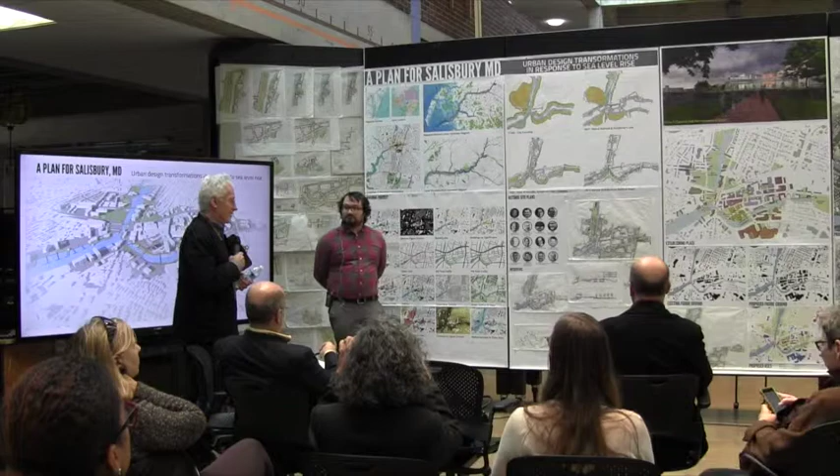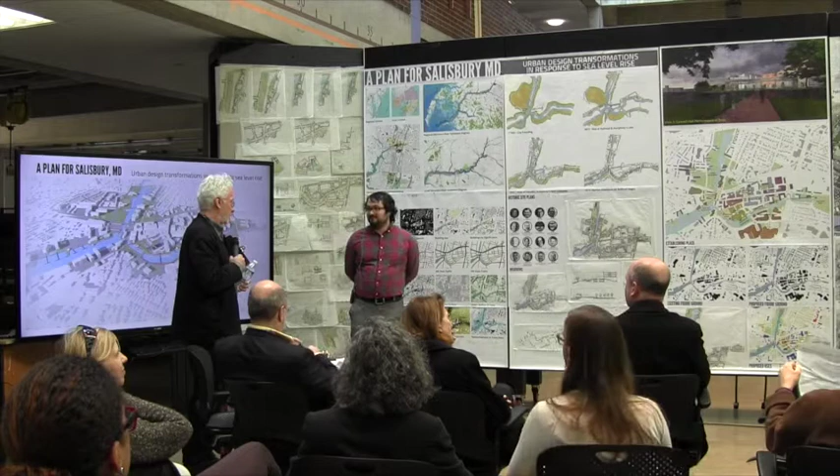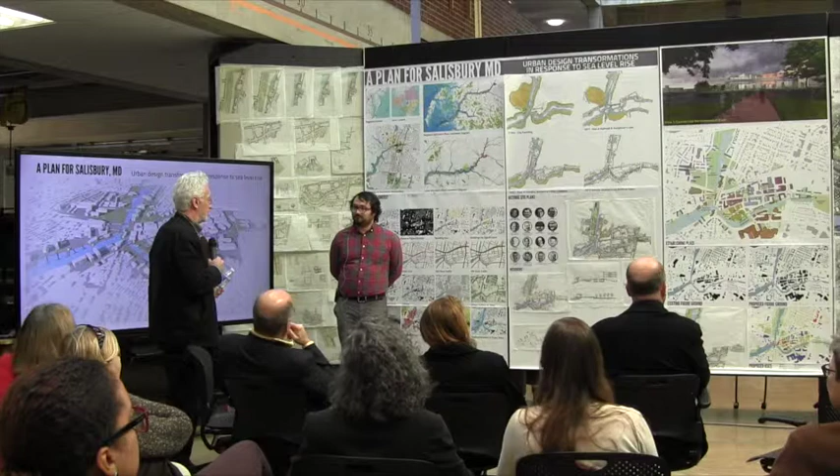And Dan has really—if you thought some of these thesis projects have covered a lot of terrain, you ain't seen nothing yet. Dan has, I think, alongside maybe one other student, been a relentless agent of stewardship, work, and energy in this thesis studio. We don't in these gatherings get a chance to see the background work that you've done to research this project, and that too stands out strong and tall among all the thesis students. But I look forward to hearing responses and reactions to your hypothesis about how to help this community understand its opportunities, to translate its threats into opportunities that operate on a variety of different scales. And I look forward to having you unpack this for us. Thank you.

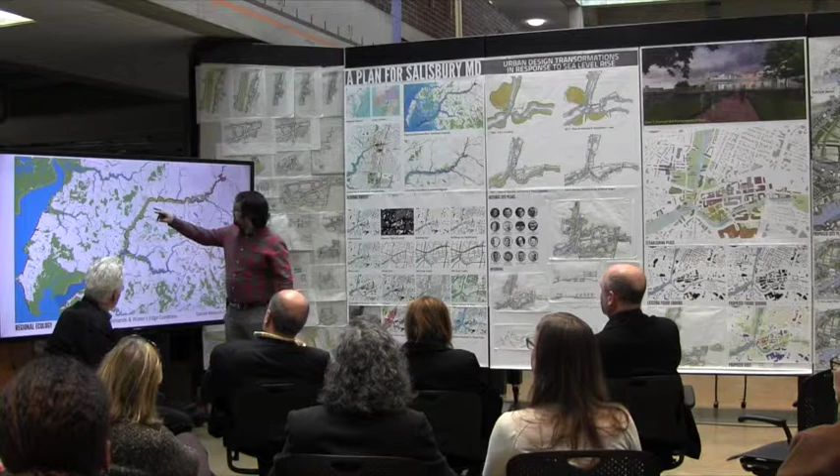This shows the Wicomico River itself and its connection to the Chesapeake Bay. The yellow is riparian condition, red is seawater access structures, and black is a hard edge. What's happened is the Wicomico River has been dredged—it wants to take this meandering path, but it's got a hard edge, and development has formed along its sides. Salisbury is up here.

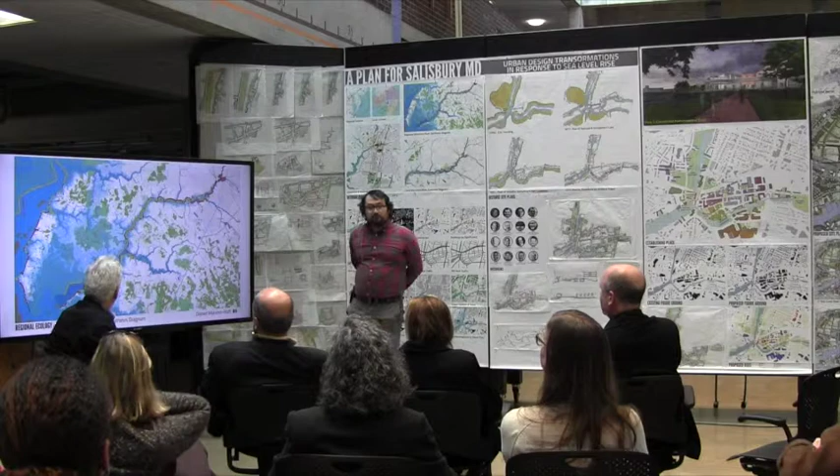This shows what sea level rise would do to the region. Really what this shows is that there will be whole areas that will be completely demolished and will no longer be viable as communities. Zooming in, we see some of the trend. We also see that there's opportunities to capture some of the storm surge downstream.

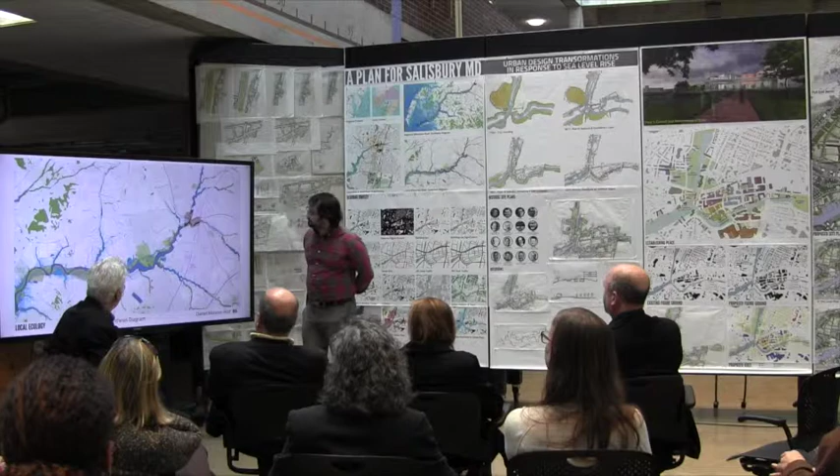This is my project site, and these are the connections to other major hubs in Salisbury—Salisbury University down here, this is the hospital, and the Perdue chicken plant. This is my site area. I'm trying to reach into the extensive healthy fabric and transform the relationship to the riverfront.

This figure ground—you can really see that downtown is in an island condition, created by two major highways and two prongs of the Wicomico River. The river's figure ground really shows this.

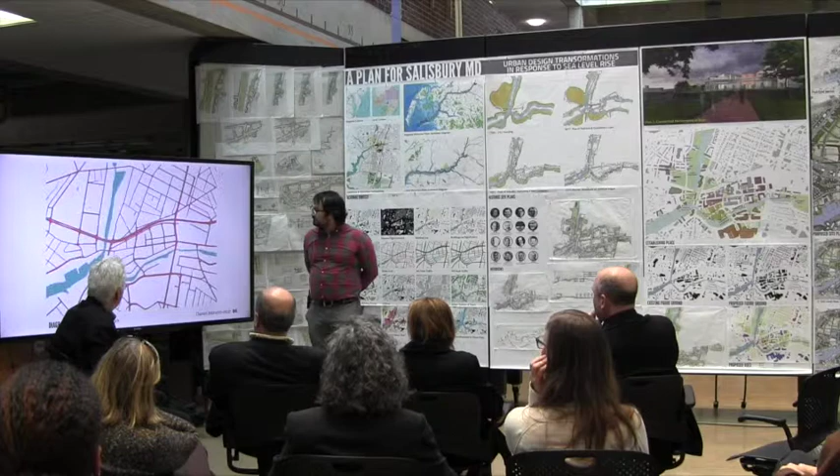Salisbury's street network has several problems: poor block dimensions, streets that start off as major ways to get into downtown and sort of peter off and become anything, and Route 50, which was inserted between two blocks and now creates a sort of mega street with building faces in excess of 250 feet.

With the help of my parents, I did a traffic study. Thanks so much. Yeah, my brother.

What you see is really that there's very little traffic through downtown, and this is one of the problems with downtown. Furthermore, working with the traffic expert, we also found that many of these corridors are actually over-engineered and can be reduced to fewer lanes.

So one of the challenges getting into Salisbury is that all of these streets are very difficult to traverse and the pedestrian connections are very poor. Looking at sidewalks and building frontages, you can see the manifestation of some of these poor block dimensions—an inability to engage with the waterfront. And bike lanes show poor connections into downtown for all modes of infrastructure.

Looking at uses, we find that there's a lot of office space downtown, very few people living downtown. Furthermore, there's a sort of haphazard mix of uses, creating a sort of placelessness, a lack of distinct neighborhoods.

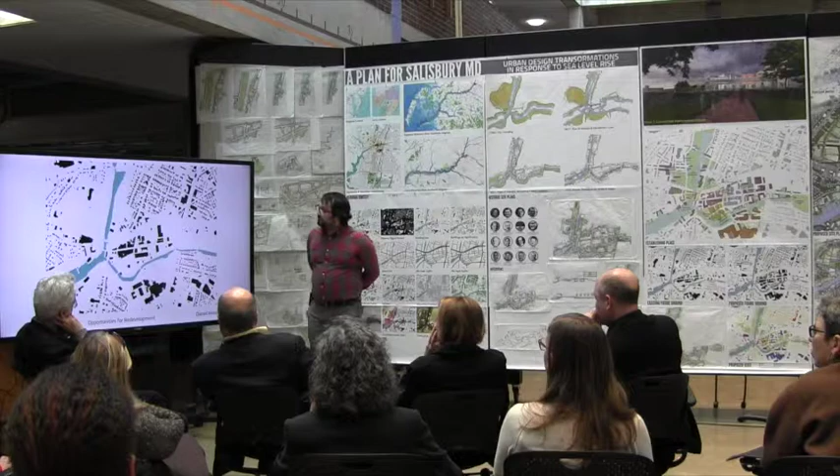Then I categorized buildings by their opportunity for redevelopment. Are they the highest and best use? Are they compatible with what's being used in the area? And what I found is that there's an opportunity to transform the relationship to the waterfront and transform the relationship to this threat of sea level rise.

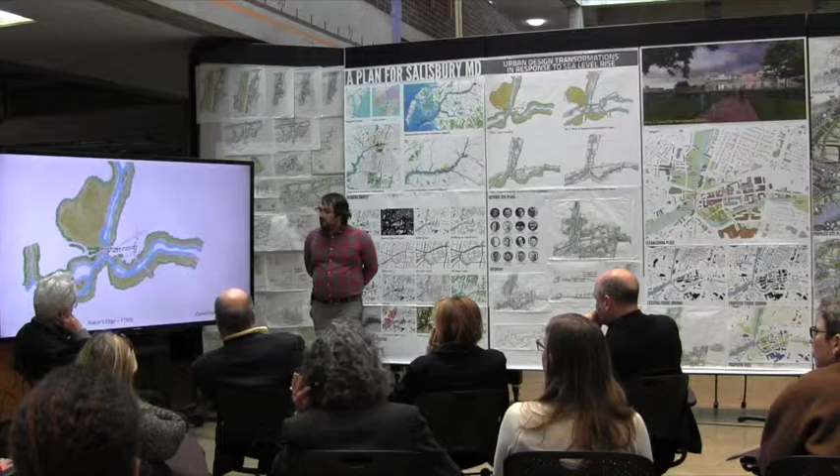I looked at the history of the waterfront condition. When Salisbury started out, it was built along the high ground on Main Street and Division Street. This is that low-lying area that I showed you previously, and many of the areas around it were very sort of soft riparian edges, wetlands.

This is about 1877. They took the major north-south street, Division Street, and created a dam for logging, and a big lake filled up the area. These were cranberry bogs up here on the north side of town. And this actually proved very useful because it helped me understand what the natural condition wants to be in some of these areas, and influenced where I thought about including a more riparian natural landscape.

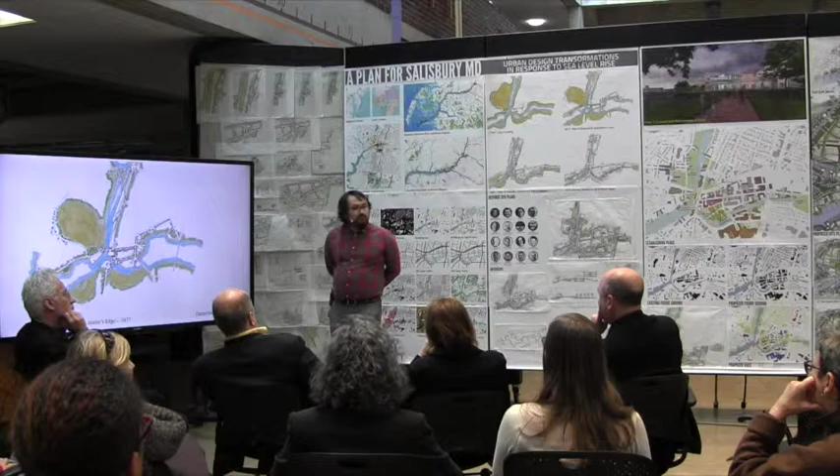We're seeing a railroad? Yes. Salisbury was a major trade hub for the eastern shore. A lot of goods would come up the river, because the Wicomico River was dredged, and come down the rail—this was their moment of interface. And as you can see over time, they really developed density along that area, and you have a lot of dense development along the waterfront, taking what was formerly a riparian condition and developing along it because of the industrial use.

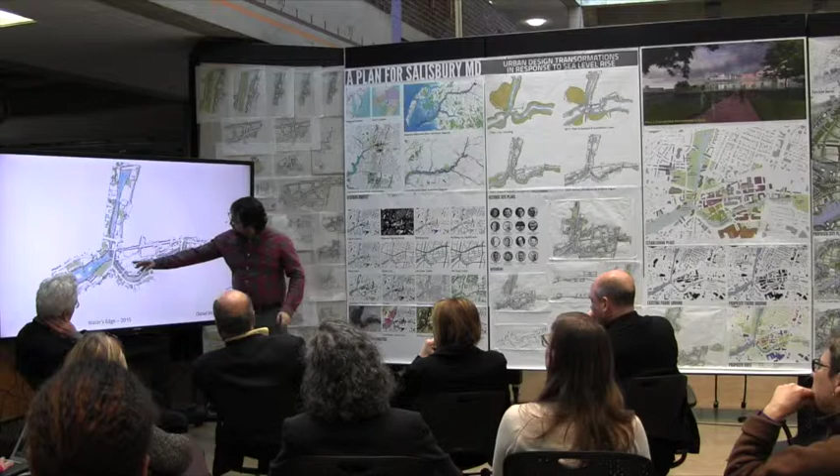This shows the condition today. Still a lot of hard edge, but not much reason for it to be hard edge anymore. And this former density that you saw is now given way to a lot of parking lots, empty spaces. There's been little redevelopment in downtown in the last 50 years.

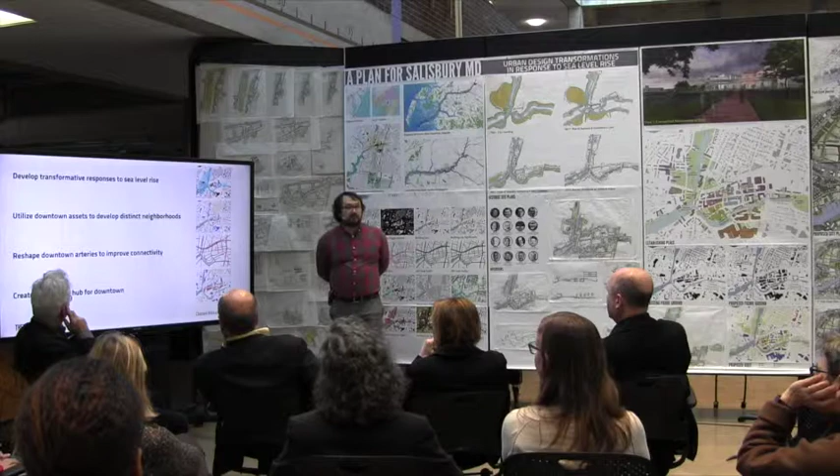Out of this process, I developed 4 principles that drove the thesis: first, to develop transformative responses to sea level rise; to utilize the existing assets downtown to develop distinct neighborhoods; to reshape downtown arteries to improve urban connectivity—correct the blocks, correct the street problems—and create a 24/7 civic hub for downtown. This was about investigating what the first phase in development should be and how it can be catalytic, which was the real estate portion of my thesis.

What did I do? Hold on a second.

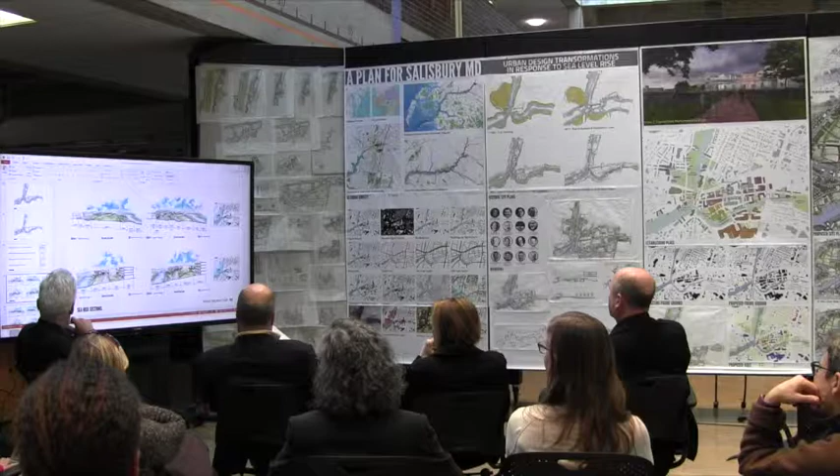So then I looked at, started drawing a lot of sections, thinking about what this riparian condition could look like. These are sort of diagrams, but I also actually took them in real places downtown, and thought about how that condition might look today and how it might transform over time as sea level rise comes in, and how we can embrace that transformation.

Maybe have a little fun with it too. Perhaps there's outdoor stages that turn into floating stages. And then I looked at different areas. This is looking at that area that's facing some significant inundation. We'll probably have to put a levee in there, but that doesn't mean you can't engage the waterfront. You can build it into buildings, build it into pedestrian paths.

And then I started looking at block typologies. How can we rethink building typologies and block typologies in order to respond to these needs? Open up to the water, pull up for protection, let the ground plane do what it needs to do, in order to bring in the water.

This led me to a couple specific strategies. This is a typical block type of multifamily typologies. Open up to the waterfront, switch to single loaded corridors in order to capture the economic value of the waterfront. Raise it up. And as you see, sea rise can do what it needs to do. Probably want to make these buildings a little longer for core efficiency.

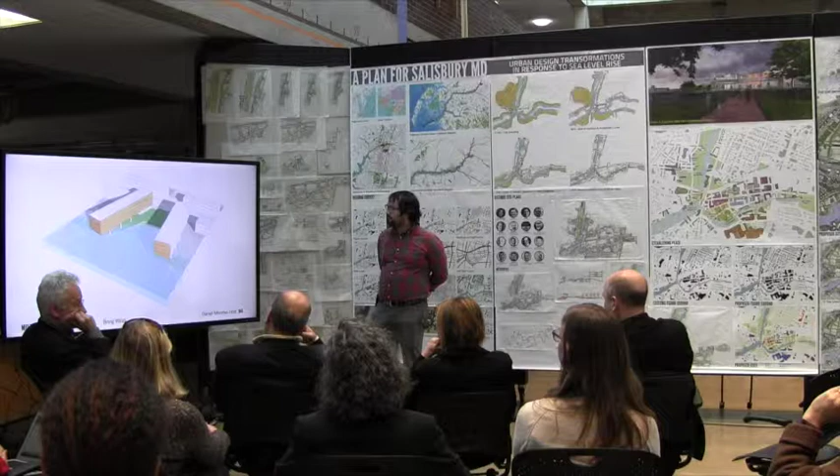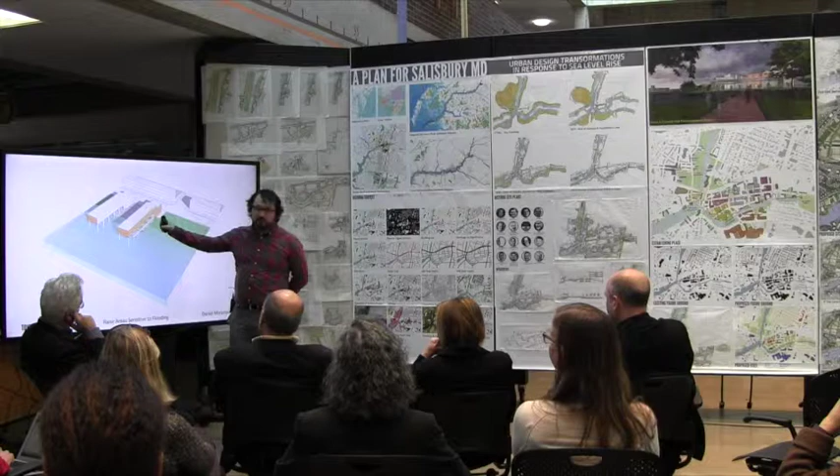Looking at a townhouse type. Pull back to create more green space. Pull it up. We retain our defensible space in here, and we can use that elevation change. We can create a clearly defensible corridor, or zone rather.

And then cant it and open it up. These reach down and come down to the ground, so the street's reaching up, the building's reaching down. But then when that's no longer possible, when the landscape goes away, the building takes a much more dramatic relationship to the landscape.

So, first phase of development. I thought this was really the place to start with developing downtown. This is the heart of Main Street right here. And this site, this existing parking lot, is a great place to start. The two streets that bookend it also bookend historic Main Street, and it has great views to the waterfront. And it's all owned by the city, so acquisition is easy.

So let me take a step back too. I really looked at a lot of different uses. I ended up proposing a civic hub for downtown. I believe that this is something that can invigorate downtown without it competing with existing retail businesses, and it capitalizes on the existing assets of the place.

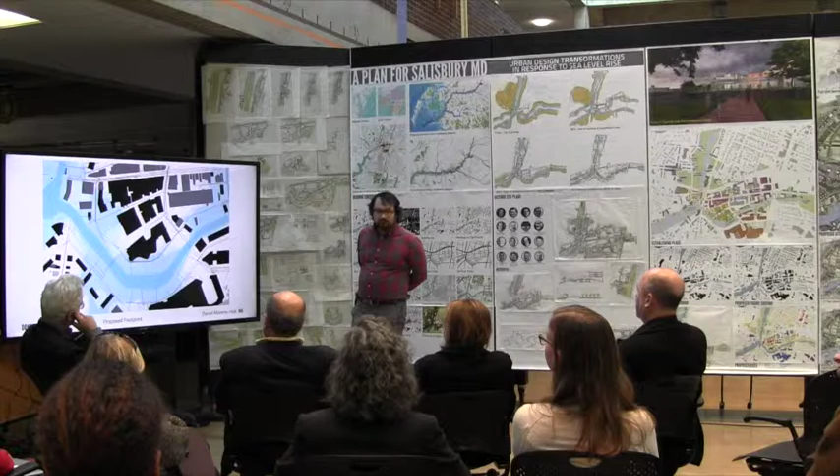So the existing condition, opportunities for redevelopment, and correcting some of the block conditions. Looking at the water and looking at underground utilities, you start to influence a possible footprint. This is how we think about protecting against sea level rise. Some of the west end of downtown is sensitive to it, so putting up a dam. Some roads will have to have temporary structures put on them. And then over here, I'm proposing a sort of elevated deck that can also act as a levee, finding ways to transform this infrastructure into an asset.

And then this is the proposed future sea level rise sensitivity, and improving the watershed condition.

And then this is the proposed uses for this place. They proposed a civic hub for downtown. Downtown is lacking many civic amenities, anchored by a civic plaza. This will include a new library in addition to Salisbury University's Adult Learning Center, which is located here. The concert hall, a hotel.

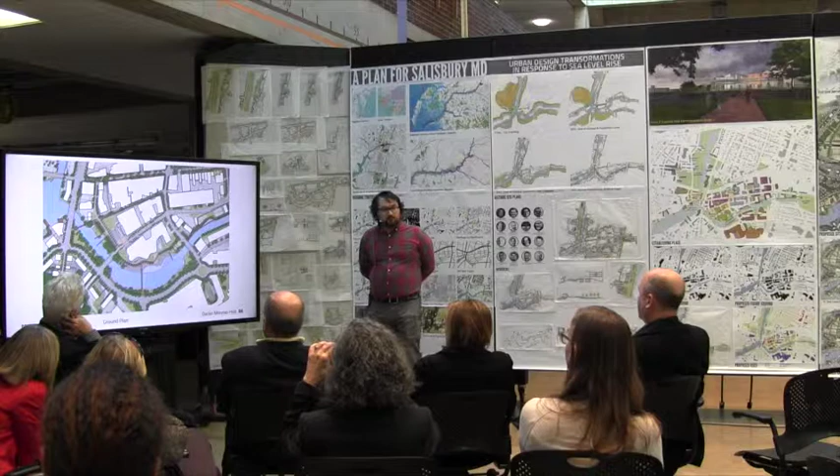Proposed uses. Here's a site plan, and here's a sort of Nolli plan showing the ground condition and showing how it transforms as sea level rise occurs.

This is a Nolli plan of the whole neighborhood, showing the parking garage and how it makes connections to other buildings, a hotel with a restaurant, the Black Box Theater, a concert hall. The library will include a ground floor living room, a double height space, and you go up to the main level, a 21st century library. And then Salisbury University's Adult Learning Center makes a connection to a pass-through that goes directly to Main Street.

This is what the plaza will look like, and here it is transforming over time. It's important to recognize that these changes happen in different temporal scales. It can be immediate storm surge, but it's also long-term. So 3 feet represents a significant storm event today, and it can also represent 50 years from now. But 8 feet at all times represents some sort of significant storm event.

Here's a view of the plaza and how it transforms. You can see that in the future, our relationship with the water will be much more tenuous. We'll have to live in zones of ambiguity.

Here's a section, and here it is all working together. Here's a view of that concert hall from the south.

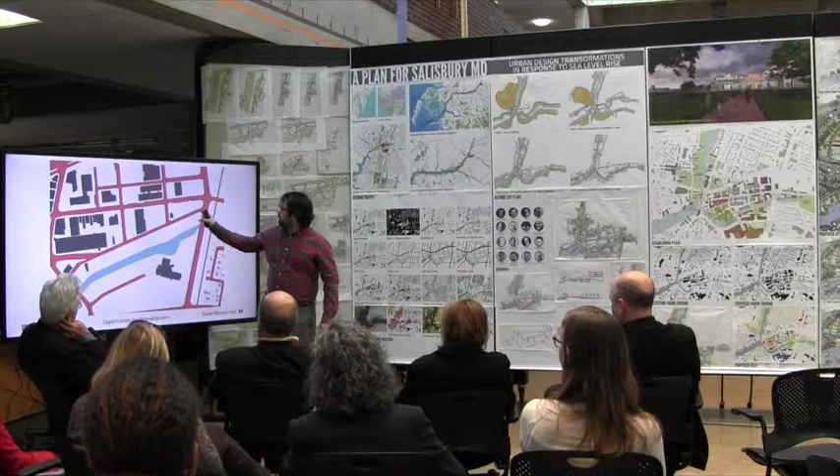Next we jump to the south prong over here. This is the area that needs some sort of significant protection - this whole area is underwater. So looking at the existing condition, we remove opportunities for redevelopment and correct the block structure by removing the street. We remove this poor connection with the neighborhood and allow these blocks to make a more dynamic relationship with the waterfront and capitalize on that space.

Here's what sea level rise will do, and here's how we're going to protect against it. We propose putting up a levee. You might have to raise this road slightly and then put some sort of temporary blockade up here so the water doesn't pour back in after you do all this.

Proposed contours - so we're not elevating that whole part back there, but we are protecting it from sea level rise through that levee. Then looking at underground utilities and using that elevated building to avoid hitting major utilities. The stormwater runoff is coming in from both sides, so we take these two streets and pedestrian corridors that connect to the waterfront and really green them, transforming them into areas that can absorb the water as it comes down here, so you have to pump less water back up.

This is the figure ground, and these are the proposed uses. I proposed on the south side here putting in a health and wellness district. This capitalizes on the existing hospital just south of here, and has a health services school that's actually been proposed by Salisbury University, in addition to senior housing, events that might take place along the waterfront, dog parks, exercise areas, and growing gardens.

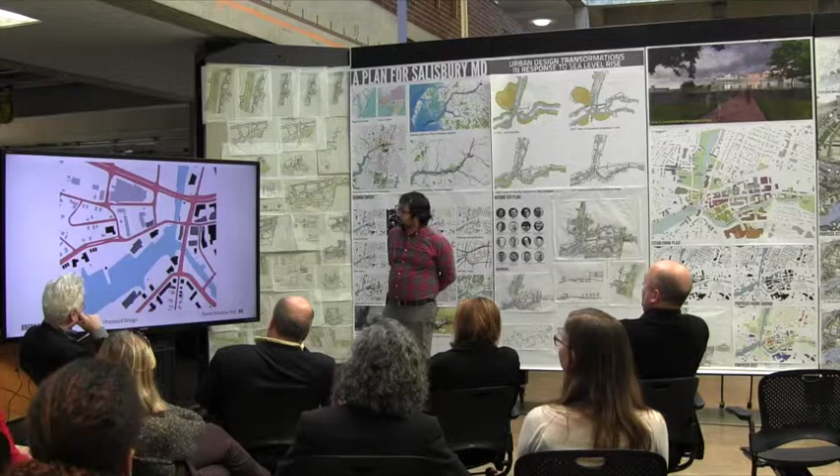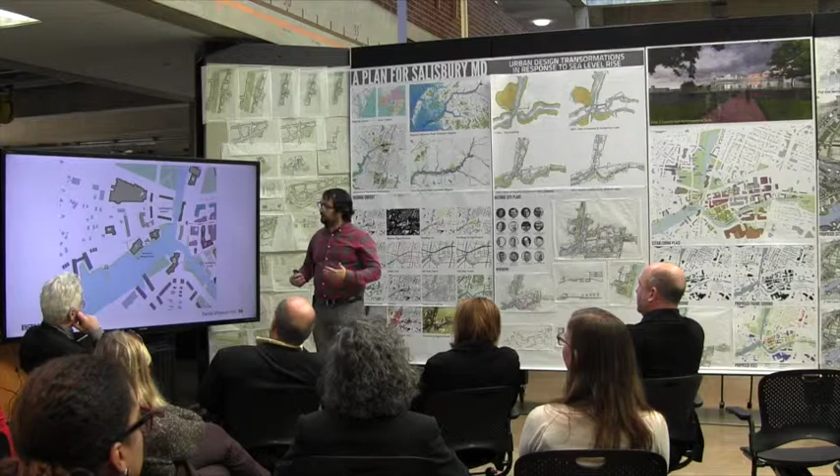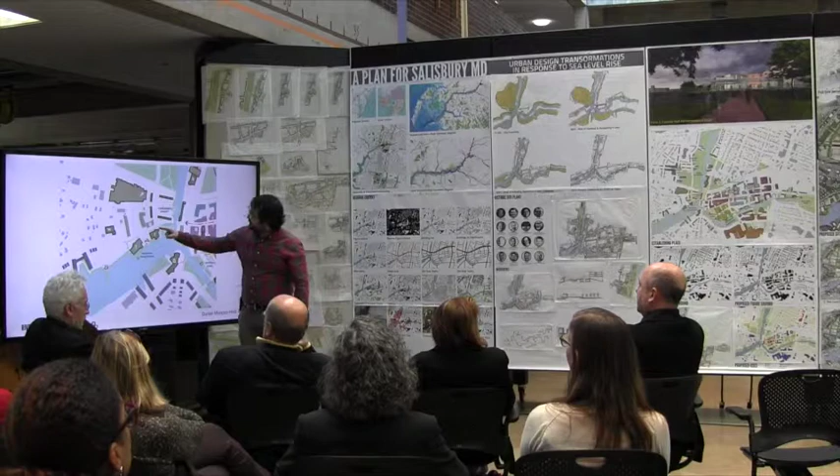And anchor it with a small restaurant that might also have a market function. And then up here, turn these industrial buildings on the north prong into a brewery and artist housing. These are proposed uses.

So in summary, this thesis proposed repairing Salisbury's disconnected condition for downtown, repairing arteries and creating greater street connectivity, creating distinct places for this neighborhood and capitalizing on its existing assets, and embracing sea level rise and the transformative effects it will have on our landscape. And with that, I'd like to open up for questions.

Well, let me just start with saying that now I understand Professor Rockcastle's introduction. I mean, you really have taken on an incredible cross-section of issues within sort of one, but using as a kind of test case Salisbury, Maryland, which I think is really commendable.

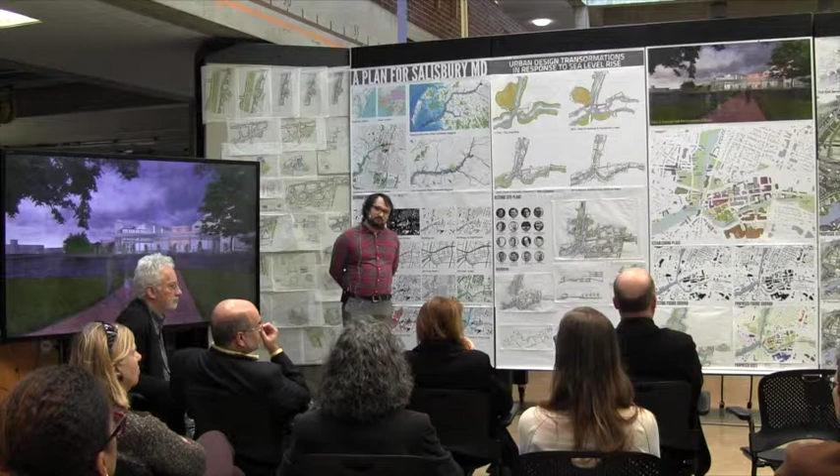And a couple of things I really appreciate about your project or about your process. The first one is that you're really very genuinely addressing the concept of transformation in time. And I think, and we've talked about that a lot in the last couple of days, many projects just seem a little bit frozen in one particular time period.

And I think in your case, your whole argument stands behind this, the ability to create an architecture that has the ability, or an urban condition that has the ability to change over time. And that's sort of embedded in the design premise and the strategy, and I think that's fantastic.

I also very much appreciate that on an urban level, on an infrastructural level, you're really considering two different types of making—one which involves landscape and transformation of that landscape, and the other involves typologies of building. In some of the earlier computer images of the transformation of the landscape, one was clearly concerned with how that landscape changes and how it might be modeled or manipulated to both accept but amplify change. And then there was the relationship of building, developing a new typology for addressing a kind of changing landscape. I think those are two really interesting points of departure.

I think a bit about the Perez Art Museum that was just completed a couple of years ago in Miami by Herzog & de Meuron. I think, for insurance purposes, not just for flooding, but 18 feet is the number that's the closest artwork can come to the ground. And so the whole typology of this building sitting in a park on pilotis, where ground plane is really called into question, not just in terms of being literally raised above the ground, but as a successive series of ground planes.

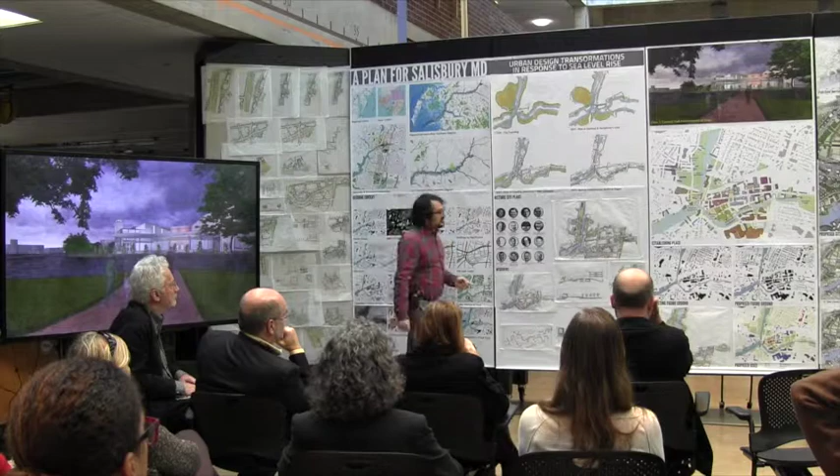So I'm proposing stringing it together and connecting it to major pieces, because I think that even going beyond Salisbury would be fantastic, as part of a much larger regional network of transportation. I'm assuming the river is navigable now that there's no more dams, or is it minimally navigable?

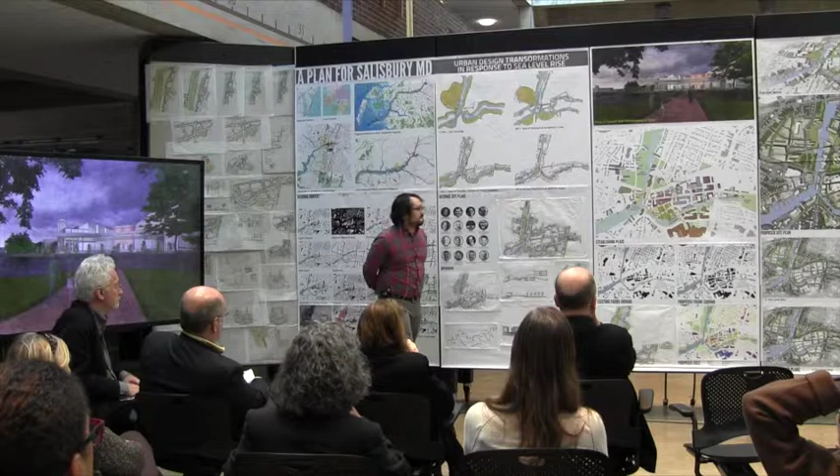It is, and in fact Salisbury is actually the second biggest port to Baltimore in Maryland. But all that activity takes place downriver, so it doesn't really affect what's going on here. But it's still dredged regularly.

I just finished working with a thesis student who dealt with Lower Manhattan, and instead of trying to keep the flood at bay, said let's embrace the flood. What can it bring? It can bring marshlands and oyster beds, leisure, and suddenly Lower Manhattan is connected to Queens, and New Jersey becomes essentially connective tissue.

It's creating a kind of typology, a literally porous landscape through surface runoff, mediating the surfaces, creating raised catwalks and elements that are perhaps expendable but are also very important to create another way of inhabiting the city. I think that's fantastic, so I really commend you.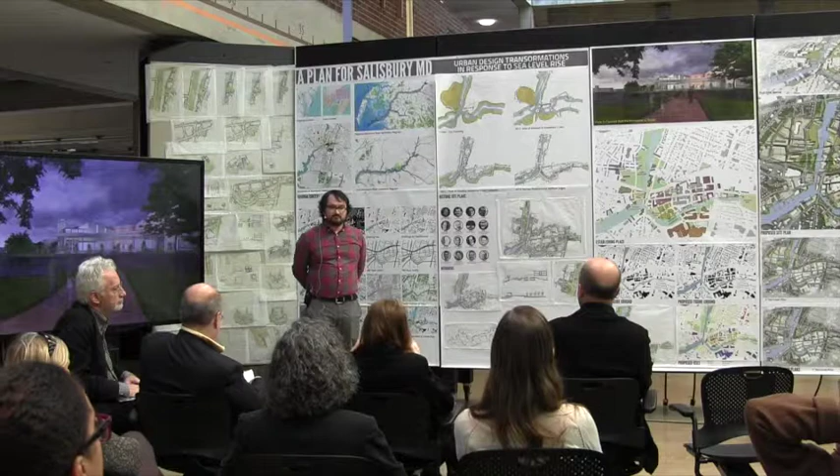The question mark, at the end of the day, while I really appreciated your renderings and the drama associated with the water, the specifics of the architectural development seem almost not clearly rooted in a process. It's not clear where the vocabulary comes from, what design choices you're making. I think that's a bit of a danger in a project where you're taking on so much.

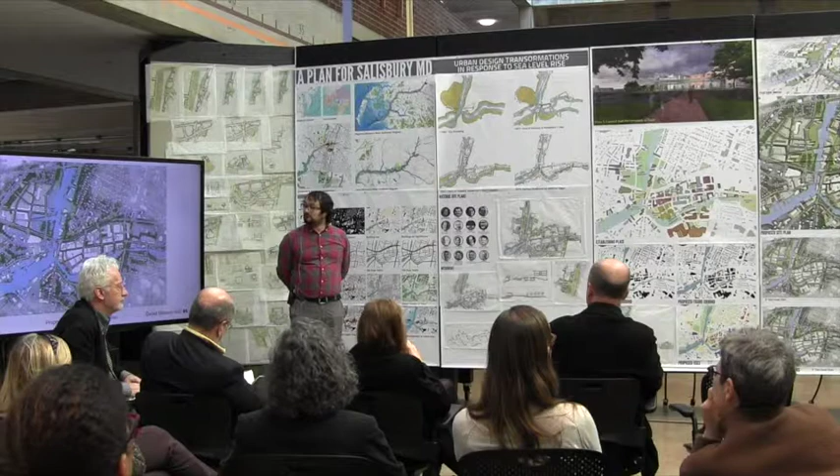At some point, either you need to apply a kind of parallel process out of which the architecture emerges, that might be more porous, might deal with orientation, might deal with environment, might deal with directions of wind and so on, which I think within the scope you've taken on may be too hard to manage.

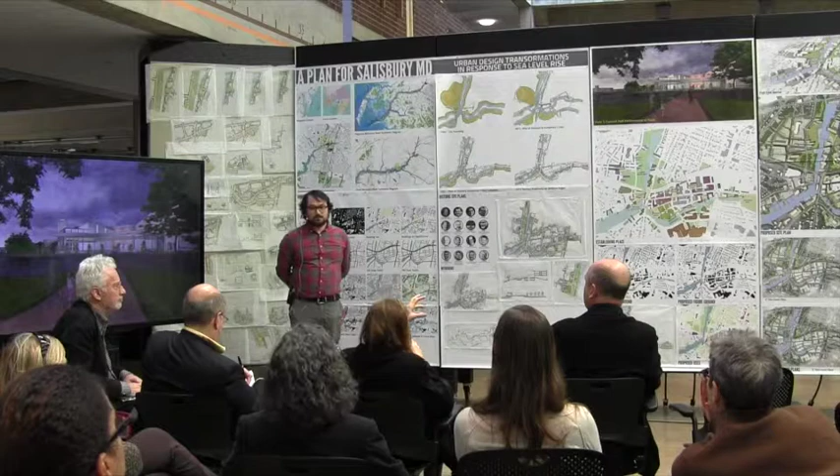So while I think maybe you put these things as placeholders rather than designing them, because in the end the design, I think, falls short of the ambition of the overall project. Sure, I completely agree with that.

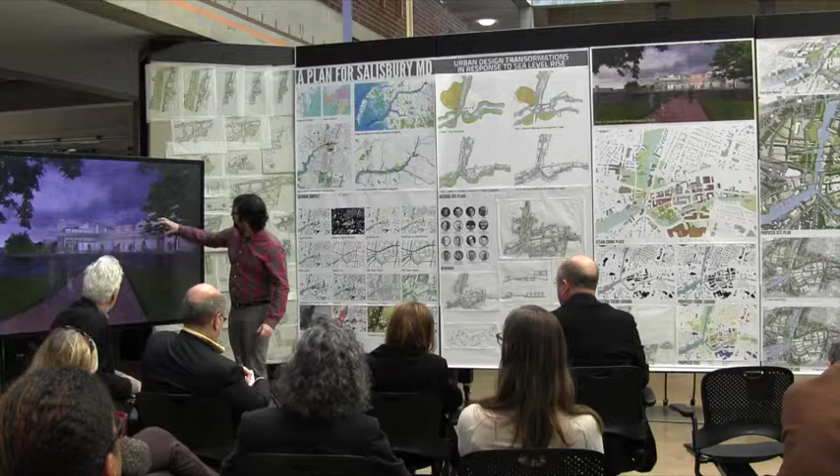But one thing I will say, I feel like the performance hall in some ways embodies some of the character of this thesis, in that what you have here is a sort of ground plane with meanders and curves, and above it the hotel, which you can see in this rendering sort of perches through. What becomes clear is a distinction between the ground level and the program, and what's happening above.

So there are really clear choices throughout the entire urban plan: what is static, what is rooted, what is part of that conceptual landscape, and what is then either dispensable or additive, more about measuring the currents. So I think that's a really great instinct you're bringing to the project, but I think it's still a little undeveloped. One question before you go.

What would you build first, phase one, if you had to pick? Oh sure, yeah, I think the first phase is absolutely right here. And this was really the real estate thesis, so this was consciously the actual first phase.

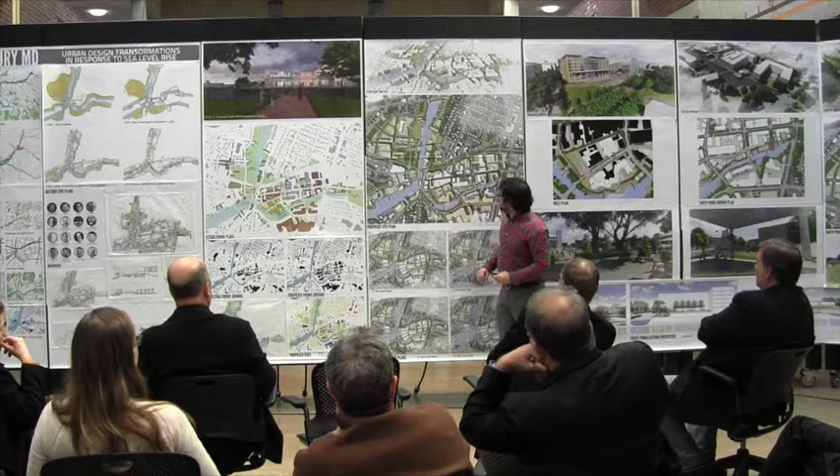There are a few reasons for that. You can improve the connection to downtown. These are the two streets that book-end the historic portion of downtown, so if we can repair these streets, we can thereby repair downtown. It's all owned by the city, so it's easy to acquire. And I think one of the biggest missing amenities from Salisbury is a civic plaza.

So we have the opportunity to create that right here on the waterfront, in an area that already floods.

The only comment I'd have is that in these kinds of towns where there's not a lot of money around, the money tends to be in things like hospitals and healthcare. Just as a side thing, from an urban design point of view, you'd want to make that impact where you said—I agree with you. But probably from a development point of view, the likely scenario is that the hospital would do something first. They're typically the ones with the most money to do something, and oftentimes they do it badly.

It's very common that hospitals build these gargantuan things that are very programmatically driven from the inside out. What's really nice about what you've done is weaving the hospital into this—today it seems very far from downtown, but by weaving it in and pulling it along the space of the waterfront, it would give them serious cues about how to be a good neighbor. Because in likelihood, if you could get more people working down there at the hospital, expanding, it would actually help support the development of other stuff.

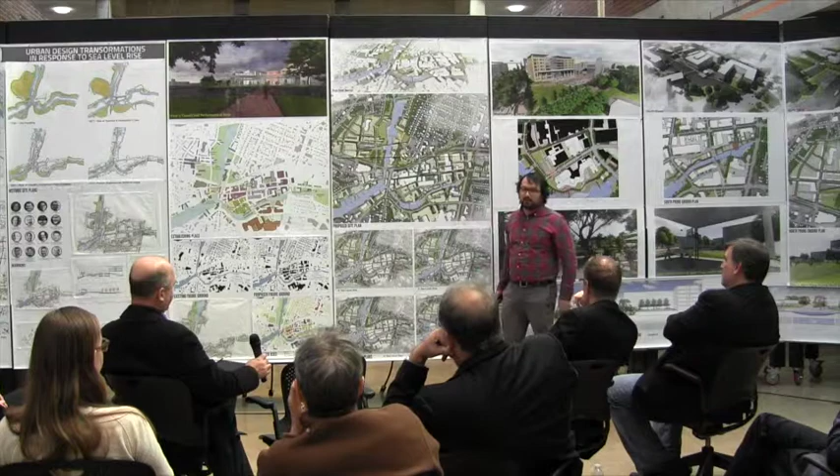This is a very interesting thesis for many reasons. One of them is that it takes a certain place that is currently depressed economically. There's something going on in this historic downtown, which is beautiful, by the way—I wouldn't believe I'd say this here in this thesis with so much information, but at least one picture of the historic downtown probably would not have been a bad idea.

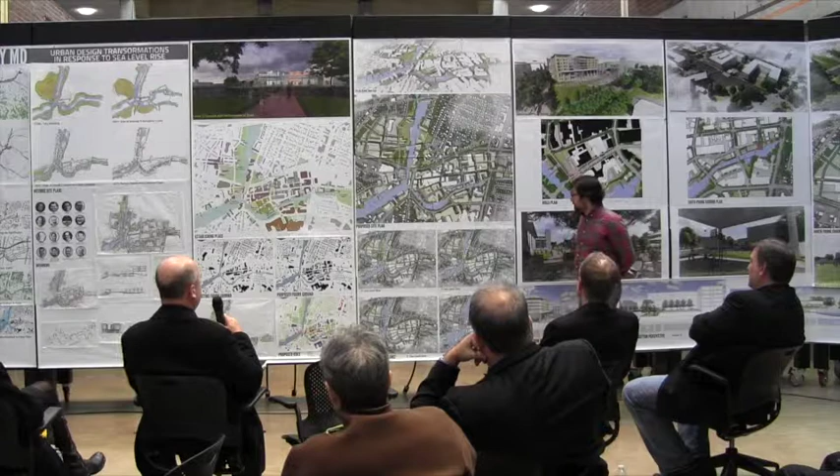It's a wonderful place, and I always wondered as I walked over there, what's going on? Why isn't this place booming? It has an amazing regional hospital, one of the most modern healthcare facilities in the state of Maryland, and I'm assuming that brings a lot of employment as well—the biggest employer in the county. It also has one of the largest industries with the Perdue chicken plant. So it has a multifaceted economic sector, yet that downtown seems to be pretty empty.

There's no car traffic. On top of it, Highway 50 is no longer the main thoroughfare, which it was for many years—before, after it was developed, exactly.

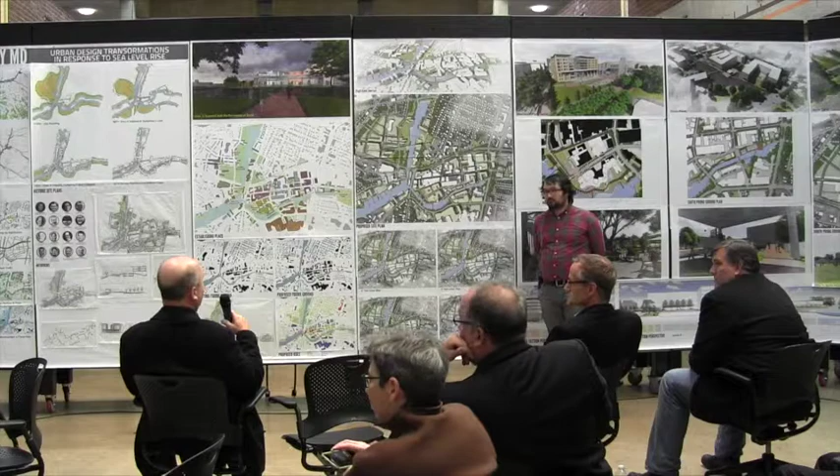So I find it very interesting that you're able to look at an impending disaster like this—global warming and sea level rise—and join it to this current depressed area, and think about a prosperous future, which is amazing, through urban design and careful surgical intervention: certain types of buildings, widths of blocks, and where you would build levee walls and not. So I commend you on doing this incredible exercise and for showing us the possibilities of what this could be.

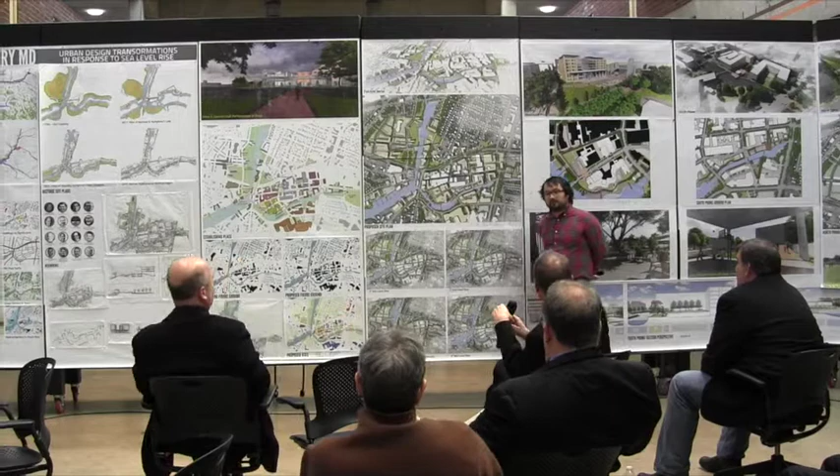I just want to say too, I think this thesis all started because I'm from Salisbury, and I've met incredibly intelligent people there. I know there's a really rich culture, and the built environment just doesn't manifest it. So I completely agree with what you're saying.

Well, terrific work, and of course it is a planning project, and I agree with Andrea's yearning for more and fuller, consistent architectural development. But the scope of what you've undertaken here is remarkable and really well done. I think you could have just selected one or two areas of this downtown intersection, and that would have been plenty. But you've been quite comprehensive, and there's a unity to the vision here and to the approach that you could see evolving in a meaningful way over the course of 100 years.

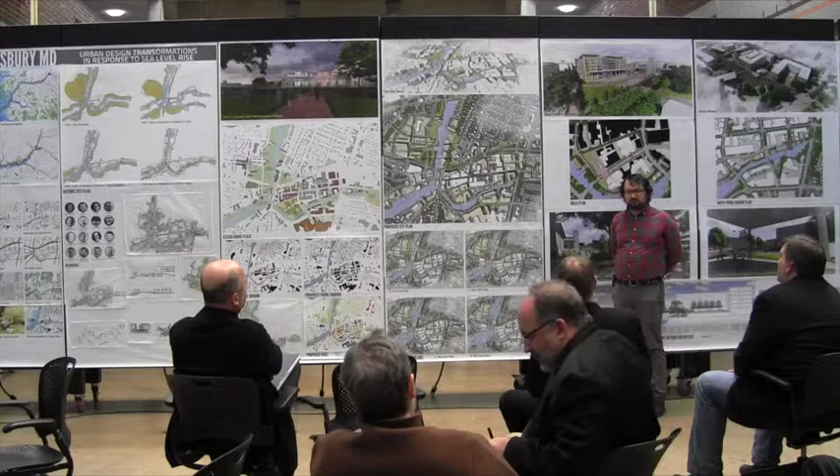And the other thing you've done as a planner is equip the architects to come along and design the buildings. You've given them a framework, an approach, and a plan and vision that would enable architects to arrive and design your concert hall, your hotel, your other civic structures in a way that would be responsive and would bring them together in a unified way over time.

And I think that's one of our fundamental goals as planners, is to equip future designers with a unifying framework. So really excellent. The other interesting thing...

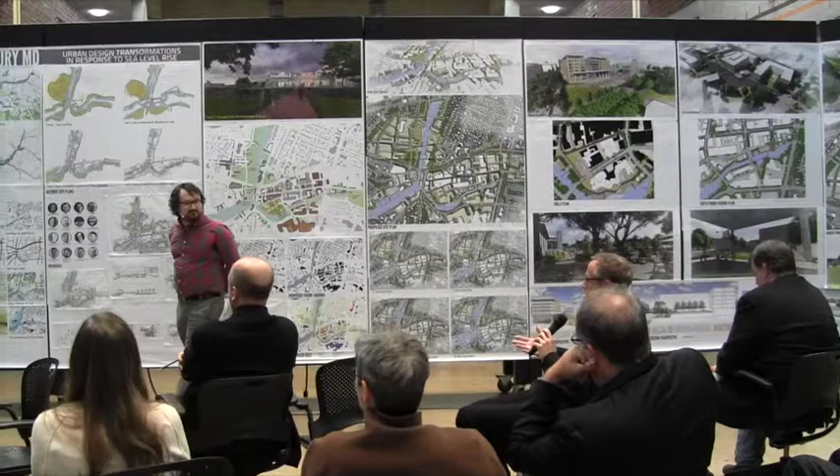In these transition images, you used the word ambiguity to talk about our relationship with the water in the future. And I think you've illustrated that well.

There's an interesting little condition at York College in Pennsylvania where a small campus drive traverses a creek, but it doesn't traverse it by means of a bridge. It's actually a wash. So when it's not a flood condition, this creek is actually washing over a concrete passage that the campus drive moves through. Of course, it's closed in a flood condition, but it's really interesting.

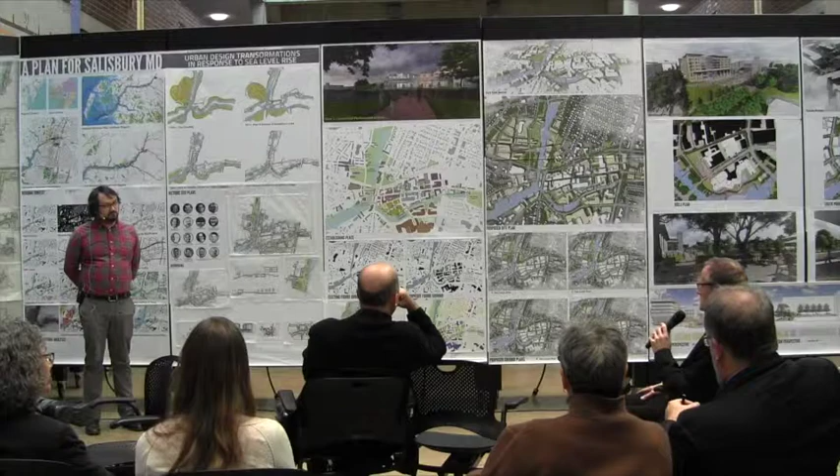Those kinds of ambiguous conditions are going to become more prevalent, particularly in places like this, where we begin to live dynamically with the changing conditions of the geography and hydrology. And I think there's probably a whole other thesis devoted to what do we do to our infrastructure to make it embrace this ambiguity. I didn't get to that, but...

Well, I think I'll start with a similar comment I had with Taylor. I'm just incredibly excited that we have our graduates looking at these kinds of problems and really trying to apply the lens of architecture and real estate development in really specific and meaningful ways to say, how can we solve the problem here?

I think in much of our society there's a reaction to ignore the problem and hope the rains are never going to come, or let's put ourselves behind a bunch of levees and hope that we can survive the floods. This is a much more reasoned, analytic approach, and I'm really glad that you took the different conditions and didn't just settle on one or look at it broadly.

You went into a necessary level of detail to say, here's specific solutions. And levees sometimes are the answer. Wetlands sometimes are the answer. Pilotis sometimes are the answer. So I just think it's great to see in the range of all the theses.

But in this one in particular, I think the restraint, similar to what we saw with Valerie, that you had the restraint to say, it's not so important what the building looks like, and I'm not able to get to that level here. I am staying at this kind of planning level. I think the rationale you had through the real estate development, that I have to look at what's viable, what's doable, and not just come up with fantastical ideas that challenge reality, down to the utility lines that you were respecting and trying to work within the existing infrastructure.

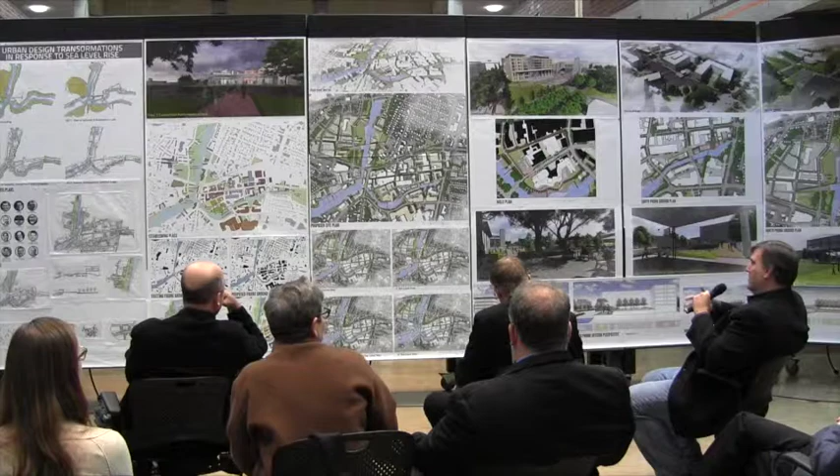I think it's just great, the kinds of questions you're asking, and the thought that hopefully this provokes, not just with you, but your colleagues in whatever professional practice you find yourself in years down the road. So thank you for bringing this to our attention.

Thank you. She's reaching. She's reaching.

I just want to build on that, and something I've been thinking about with all of these projects. First of all, the notion that these kinds of challenges really require us to build partnerships with a lot of different kinds of stakeholders, that they're too complex for a single solution to solve the problem, and a single stakeholder to take it on.

And actually, we've seen this in a number of projects, and I really appreciate that. I think the fact that we're talking about this and seeing projects that are building that into your thinking is really, makes me very optimistic.

In this particular case, many people know here that we have the good fortune to have a graduate of the program who's an architect, who's the mayor of this town. So that fact, together with your good work, Daniel, means that these drawings may come in front of somebody who is very likely to appreciate the need for taking action here and appreciate the gift of a framework to start addressing it.

So you have that handed to you. I'm going to give him a call.

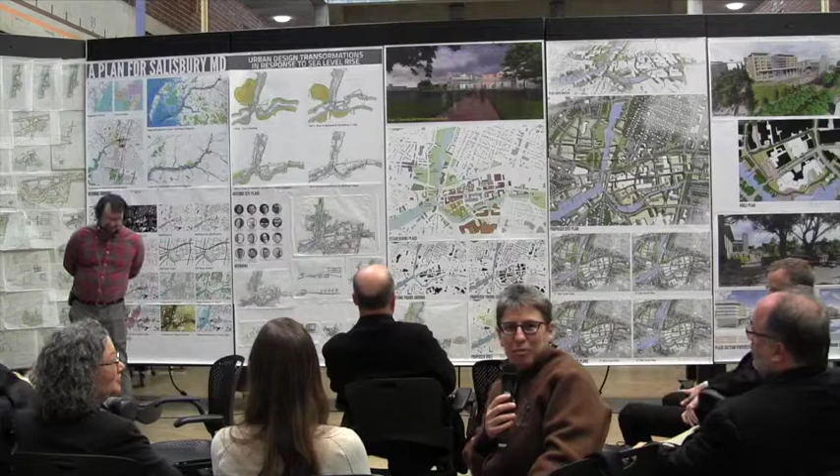For everybody else, those of you who are about to do thesis and those finishing, whether it's the real estate program's work or architecture's program's work, I think there's a challenge that this work doesn't stay in this room. This work has legs, either as prototype projects that get published, or going back to those communities. That's a place where we'd love your ideas, because perhaps we as faculty can help you do a better job with that. There are too many good ideas here for it to just be the things those of us here on this day get to see.

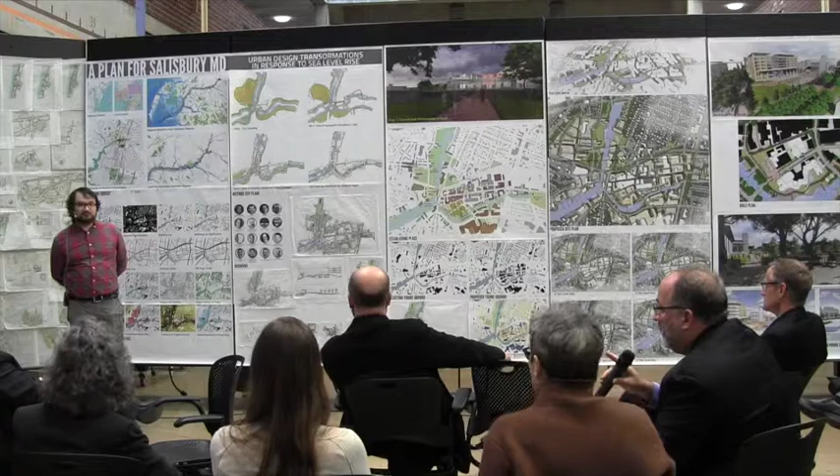Just to build on that conversation, I want to add one thing. I think that's really important, the point Renee just made, because part of the service we can provide is helping towns like this think of a different future. Oftentimes what happens is the town is understaffed and overwhelmed, and they don't have enough resources to really address all the things going on. I think we really need to get with the mayor and show this.

I think one of the big virtues of this, just to push back on a distinction you made earlier, is that it's not planning or architecture — it's all the same thing, just at a different scale. The fact that you can operate at the scale of the whole town and give us a sense of what imageable public buildings ought to look like along the waterfront speaks to me of a kind of seamlessness in your thought process, Dan, which I think is really important.

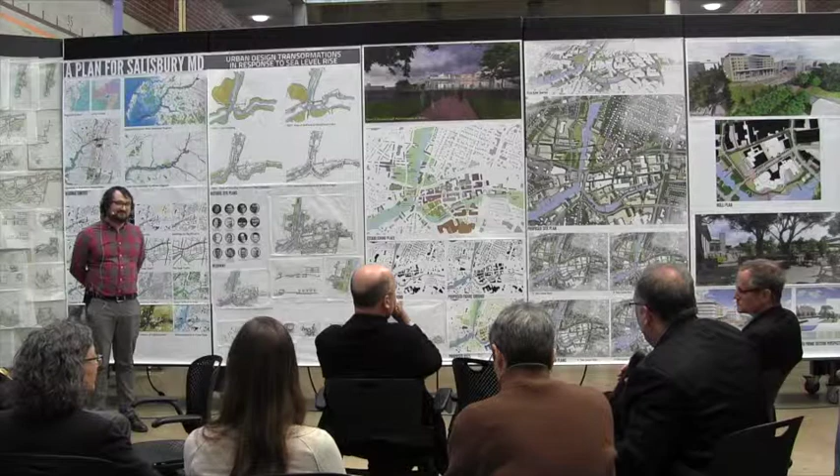It's not one or the other. We don't plan it so that somebody else can design it — we plan it so that it can be designed. It's just a different scale, and in this case, it's the scale of the whole city, the scale of the landscape.

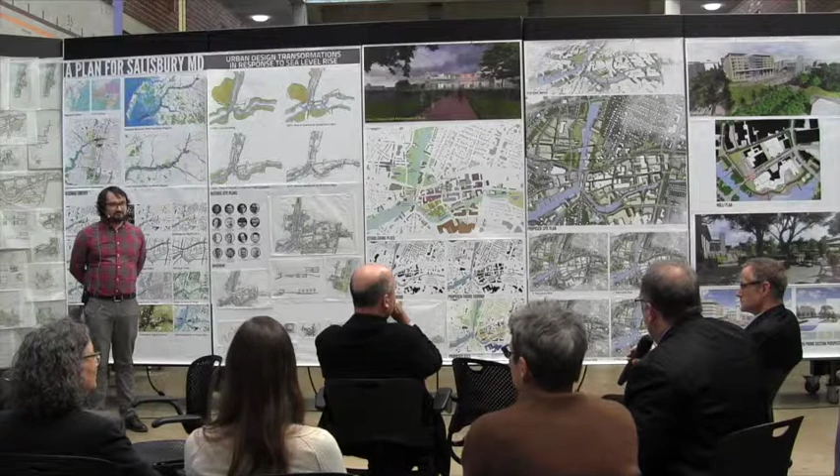In actual fact, I admire a great deal that you're giving us an idea of what the character of some of these buildings ought to be like, even though you didn't design all of them. It's really clear you know enough about the typology to have a sense of what the imperative in that direction might be. I think that's an important skill for architects. Sometimes architects are like jewelers — they just want to look at a piece of jewelry — but in actual fact, the role we can play can have much more impact.

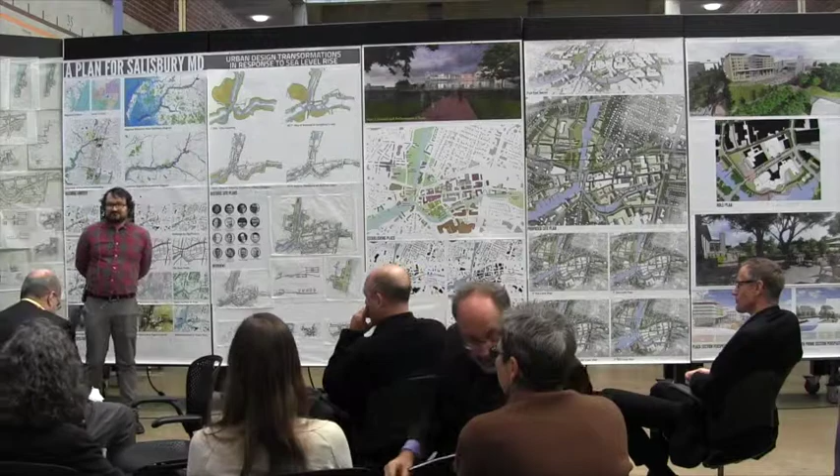Before the chair, Brian Kelly, has a chance to wrap up, I wanted to mention a couple things that came to mind for the first time through the presentation. It's triggered by something you and I have chatted about a bit, which is that the water, rising, isn't always in its ordinary state — in its elevated state it's rather a nasty thing. It's brown, it's smelly. We talked about things floating, etc.

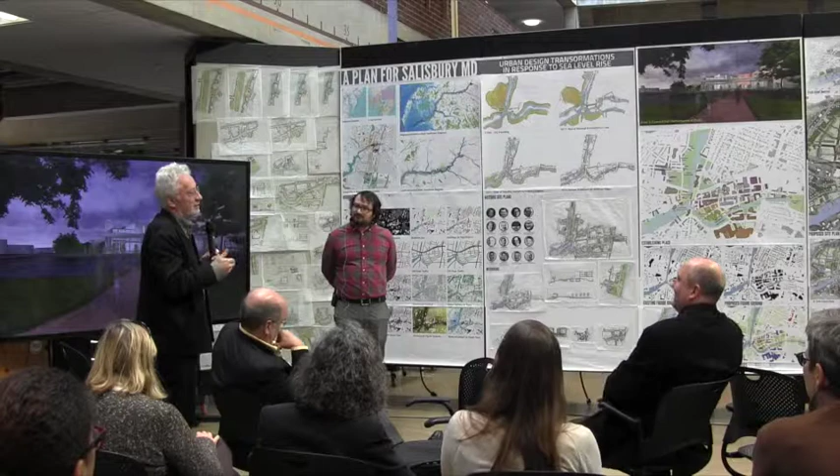But that was the leaping point for my thought, and then I began to think, because you've given us such a great sense of time, as has been mentioned here — that trace comes along with it, and landscapes are going to be quite a bit different than we're rendering. Not a criticism, because gosh, you've done so much here, but I'm as excited about imagining the trace of the past — wherever you've seen floods, the high line leaves that dark trace of what was there — and then the layering of that on this landscape, no longer wanting to be manicured green, actually evolving and becoming a little gnarly, a few things disrupted.

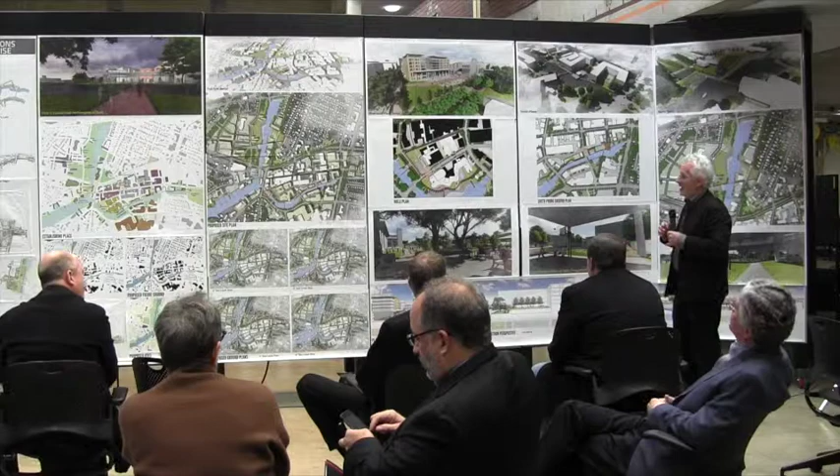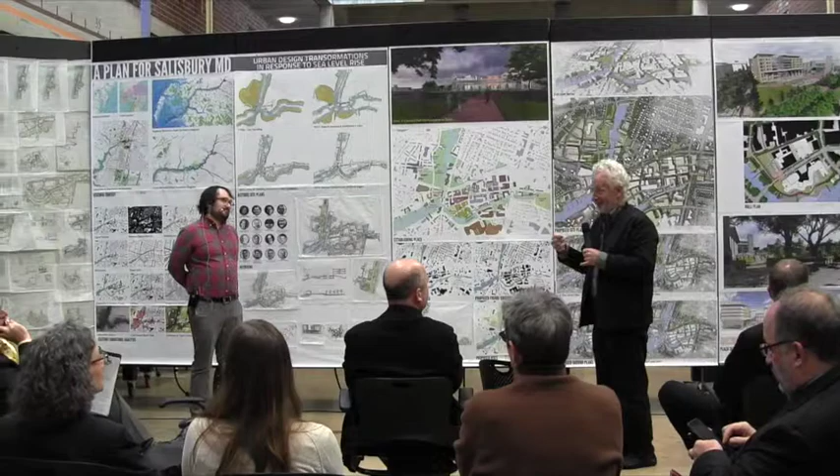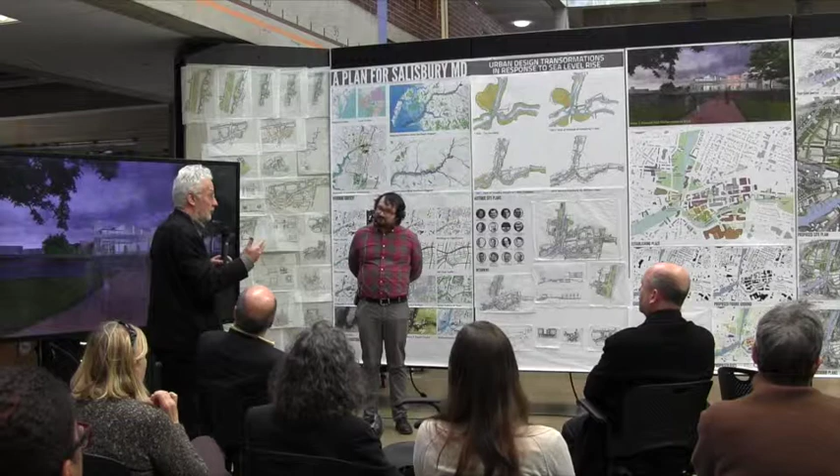Eventually, I think if we can begin to depict time not just in terms of action but in trace, and the richness that comes with that, and how our aesthetics might engage that same patina — I think of some of the current texts being written on weathering and that sense of time. You've brought us so wonderfully to the frontier of our ability to think across time. I think that remains a little chapter for all of us to think about — if we can bring the joys and the power that come from these traces, and how our aesthetics might commingle with that time, is something you've left me with.

Dan, that's an interesting point, because in your real hometown, your town of birth, throughout the town there are these benchmarks. These benchmarks exist, and the most prominent are from 1870, when the Tiber got out of control. Some said it was the result of political reasons, insulting the Pope by the unification of Italy. At any rate, one could imagine a record throughout the city of the deluge.

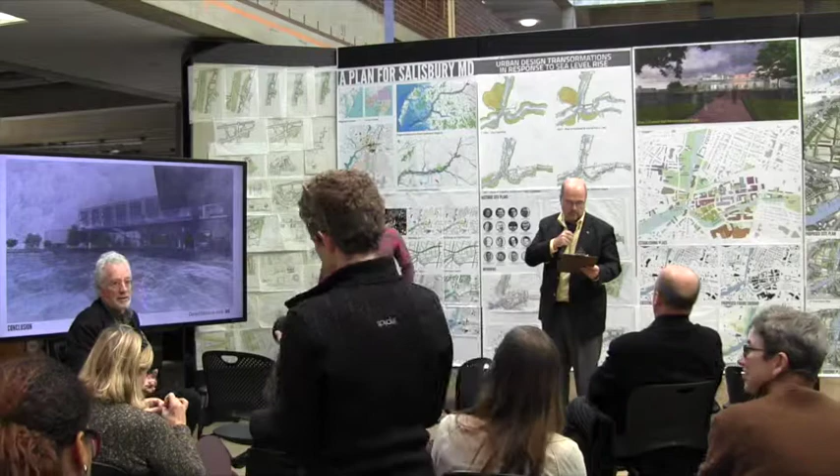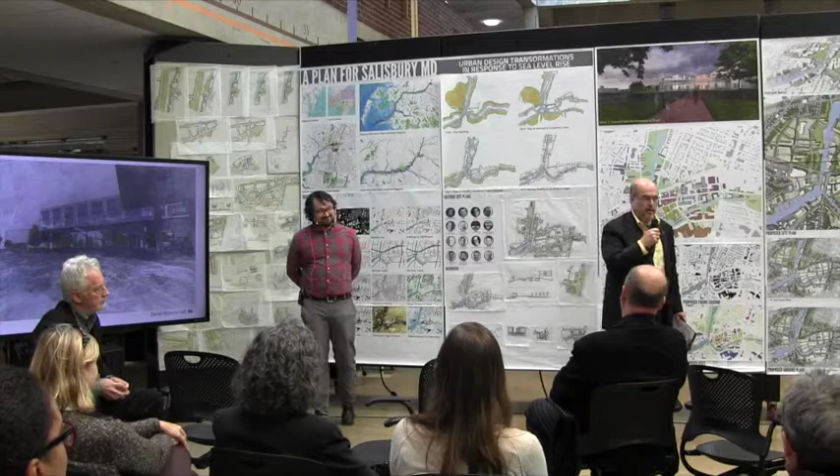Getting back to Daniel, this is a project exploring the implications of a problem that exists at the global scale, at both the local and regional scale. It's a difficult problem, not a soundbite. It's all interrelated. Climate change and sea level rise doesn't care if you have bad hair and you're a Republican, or great hair and you're a Democrat. It doesn't matter at all. It doesn't care. It's going to take its toll and do what it wants to do, and we can pretend it's not going to happen, or we can begin to develop responses.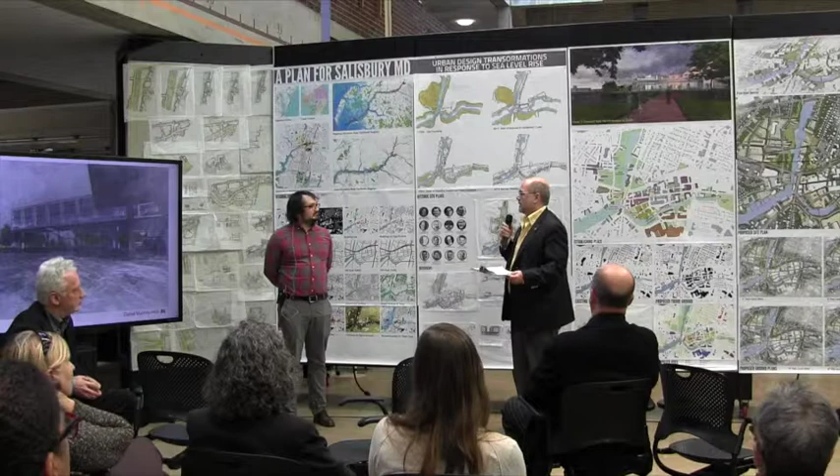For me, the power of the sectional drawings and these transformative drawings depicting places undergoing the siege of the water, and then accepting the water as a kind of new reality over time, and the transformation, has been very helpful to my understanding of how to respond to the problems. The stakeholders issue was a really good point that was made. This sort of Hollywood squares of individuals is highlighted, and oftentimes in theses or student projects, they're highlighted as cameos for people who might be stakeholders, but maybe or maybe not the designer has ever really engaged with them.

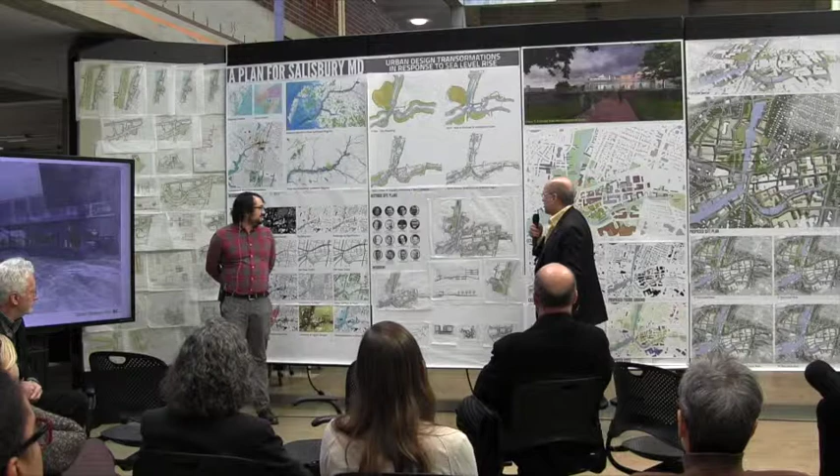But I can tell you it really shocked me that Dan had an hour of time with the president of Salisbury University to discuss her desires to see a better Salisbury. He spent time with Jim Ireton, the former mayor, with Jake Day, the mayor, with Memo Drickard, and a whole series of people. Everybody you see on the wall here are people he's acted like a sponge with, mining things from them and bringing their ideas to the table in a very successful way. And Andrea was mentioning, unfortunately she had to leave, but one thing most of us have been talking about is how this thesis deals with time.

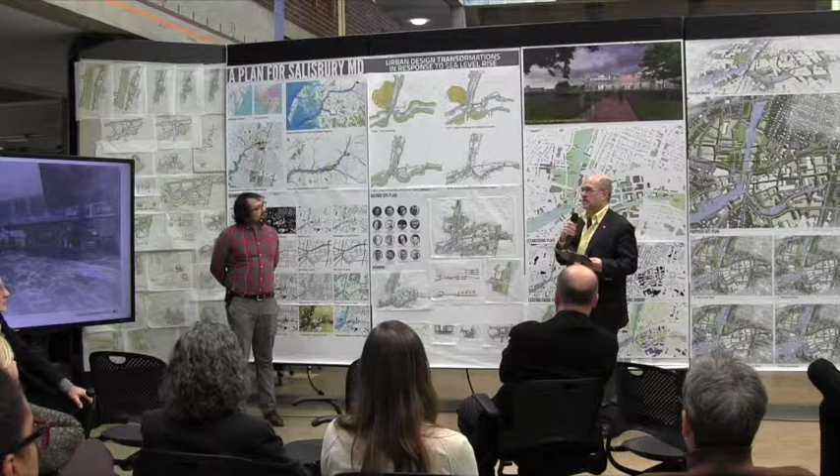It deals with place and time simultaneously, and with the idea of time affecting change on place. As Andrea was talking, I was thinking about Dan, who I know as a very facile designer and very serious individual. I think his ability to deal with the temporal, and maybe I'm wrong about this, is directly related to his grasp of design thinking methodologies, and his willingness to always explore variations. He was never hampered by fixation and falling in love with a particular scheme, something that happens to so many of us. We could all say this has happened to us, where I like my design work and don't want to change it.

Dan, every time you'd sit down with him and give him a crit, there'd be a gazillion more of these things over on the side. About two weeks ago, he was worried about generating all of this stuff, and from my perspective it was like, well, worst case scenario, if the plotters break and you can't get this out of the box, you can just pin up all this other stuff and you still got a thesis. So thank you very much, Dan. It's been a pleasure.